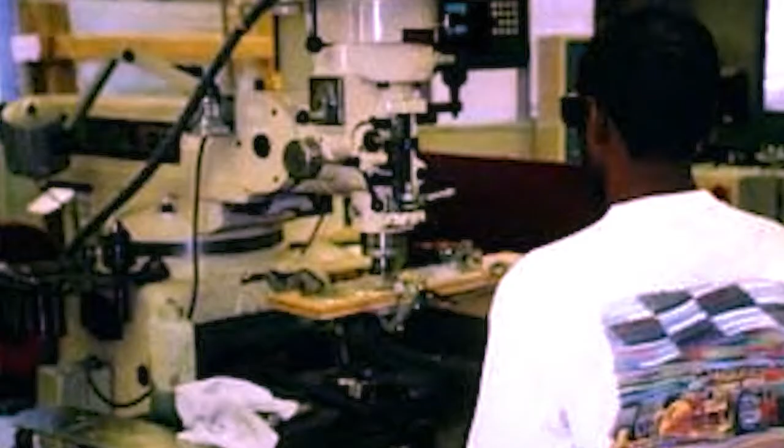When I was growing up, I had visions of fantastical giant robots that would fight for good, and amazing vehicles that had a configuration for every situation. Cool engineers and inventor types that were knowledgeable enough to get out of any predicament. Or strong warrior characters with indestructible weapons that fought to protect that which was good. The influence of these shows told me of what I was to become, an engineer.

I've spent countless hours contemplating how I can make that which I've seen into reality. Now I have the power to do it. I've designed and created many things, and I've been doing it for over 25 years. And now it's time for me to share my process with you. I draw inspiration from concept art, shapes, ideas, media, nature, whatever.

I'm going to show you how to take a vision and step by step make it into a reality. I'll share with you the tricks that I've used to help me create things for over 25 years. Now, join me as I endeavor to create a whole new plethora of projects. From the simple, the niche, to the overly complex. This is Designed by Purpose.

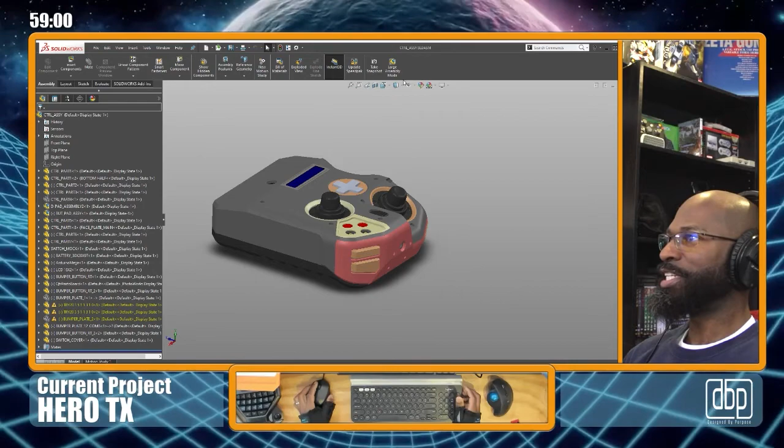I'm kind of anxious to get going and stream today, and maybe stream every day, because I see that when I stream, I'm working on the project, and that means it's getting closer to completion. That means it's closer for me to be able to use it. So I'm really excited about it. I've been wanting to build my own radio for a while. And so now I have the power to do it, just like the video said, right? So that's what we got going on.

So recap of yesterday, I was working on the bumper. I streamed. Of course, the stream had problems because for some reason my computer's upload bandwidth was really shaky yesterday. So anyways, I restarted, did some refreshing and stuff. So it seems to be working good today. So we shouldn't have that jittery video.

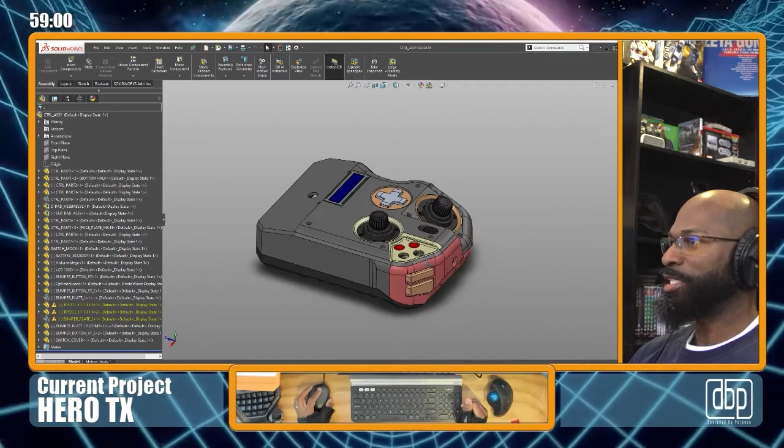Okay, but I was working on the face plates. I combined the two face plates into one part. And so that's what you see here on the front of the Hero TX. So I'm really happy about that. I still have to go back and clean up some things, but I'll do that at another time. Mainly, I just want to press on.

So also yesterday I was working off camera. I actually started building an on and off switch. I already had a place for the on off switch to be. I have a mock representation of the actual switch. I'm not going to grab it. It's somewhere in the little project box, but I have a switch that I'm using. Just a single pole, single throw switch, I believe. Yeah.

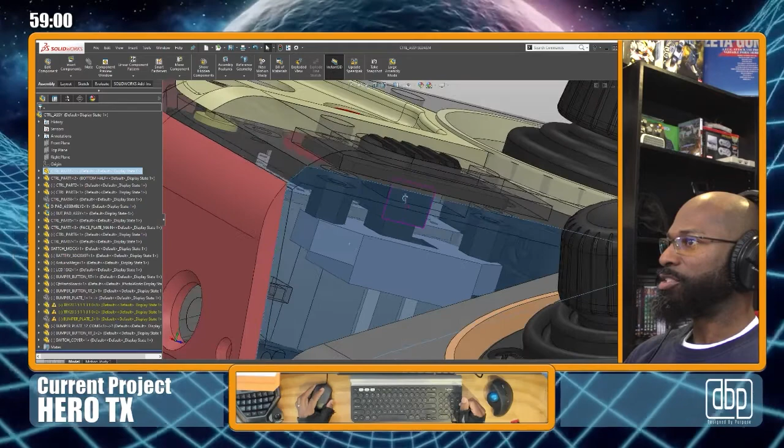And it's got standoffs on it already, and all I have to do is 3D print a little switch cap. I've got the dimensions mostly correct. I need to get a little closer for the switch stem. So I need to take care of that, but I won't do that right now. But you can see that the gray faceplate is what holds the switch cap in. So it's got this flange on it.

You got the switch, the little part where your finger's going to touch. Then you got a flange just floating right underneath the surface of the faceplate. I had to make sure that the slot or the opening or the void was big enough that the switch can slide back and forth. So that's cool. I think that gives another reason for using the faceplate in the first place.

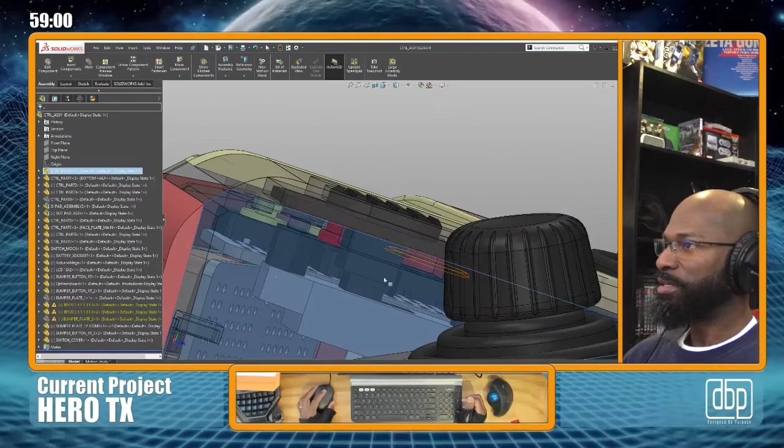You know, I could have done the switch underneath the original piece, the main portion, but the faceplate gives me some other options. So, I mean, you can design it either way. That's just the way I chose to do it. But I think it's coming together pretty cool.

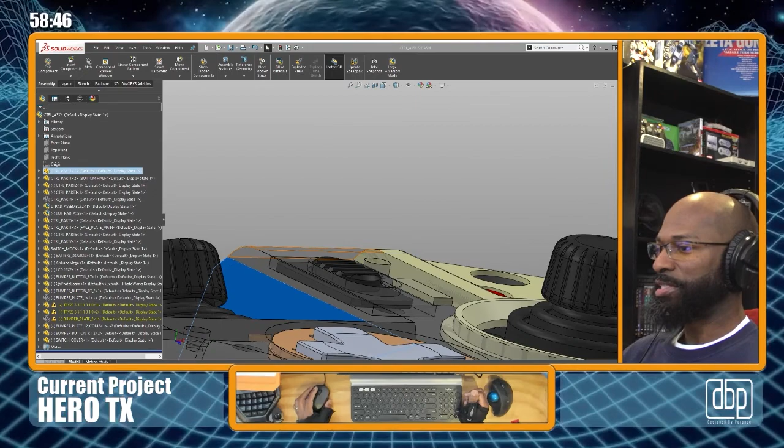So, all right, let me put that. Oops, I forgot something. I'm getting used to it. I forgot to turn on my timer. Let's see here. Start it. All right. Back to the grind. So yeah, today's episode is playfully named, oh no, I'm pushing the wrong buttons, playfully named The Grind. Make sure I push the right buttons. Here we go.

So yeah, this is the grind. Doing it every day, trying to get this thing done. I have other projects to get to, but this one's the current one. So, okay, we got the switch. Of course, we're not going to work on these buttons.

What I think I want to do today... I also finished up adding a duplicate bumper button, right? I added that to the left side, so that's good. The clearing for it is good. I do want to open it, but I'm not going to do that. I'm going to make progress. Let's see something else we can make progress on.

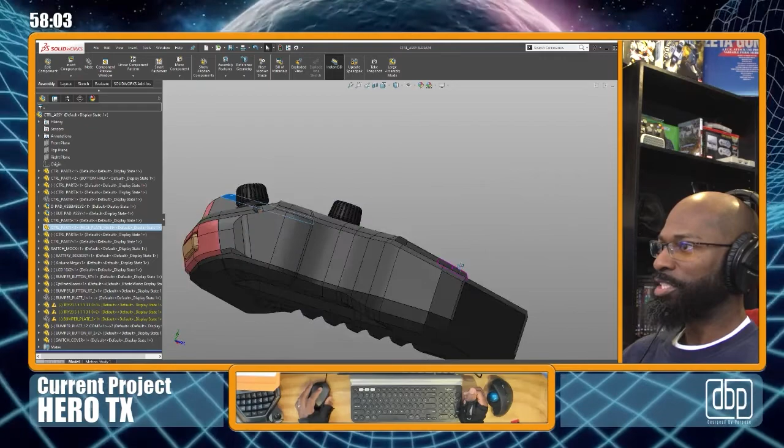Now, just so you know, let me open this up. This is battery operated. I actually do have a LiPo battery that I was planning on using, but actually I was going to buy a new one, and this box right here represents the dimensions of the new battery. I think it is from Hobby King. So this represents the dimensions of the new battery, and I want to make a battery tray for it.

So what I want to do, like my old Futaba, it has a hatch on the back, a snap hatch right here on the back. And that is how you open it up. Matter of fact, I can just go to the Futaba real quick. So you can see on the Futaba it has that hatch that comes open, and you have the plate. I don't want to do that same thing. Not knocking it. I just don't want to do that.

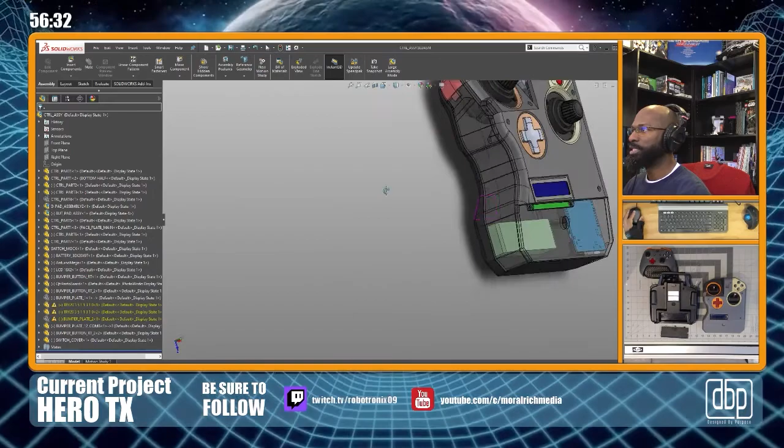What I was thinking about doing more was having a battery tray that slides out from the side. Partially the reason why is because this is all run by an Arduino Mega. You can see this is the Arduino Mega model, courtesy of GrabCAD, I believe. So I'd like to do some kind of tray, but now I have to think, is the tray going to actually be attached, or does it slide into the back side, or does it slide into the front side?

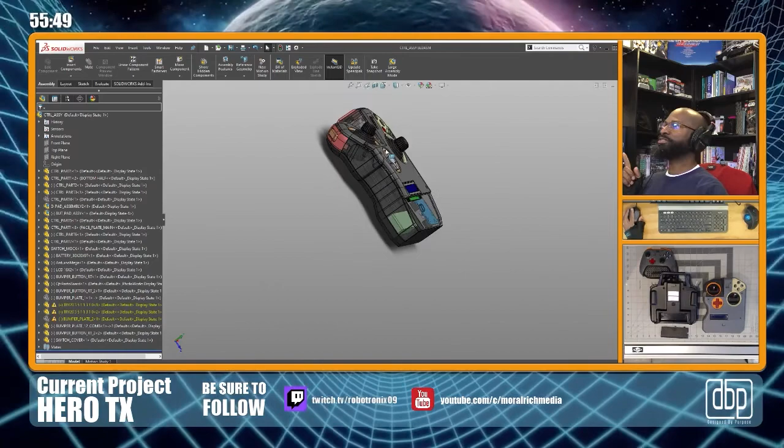Because here's the thing. When you're working on this radio and troubleshooting it, and you take it apart, you unscrew it from the back and remove the black back cover, right? You remove this side. I want everything to be on this side. I want all the electronics to be on the front plate, so that if I'm working on it, I can just work on it that way. I don't want to have to unhook something from the back plate. If I don't have to do that, I shouldn't do that.

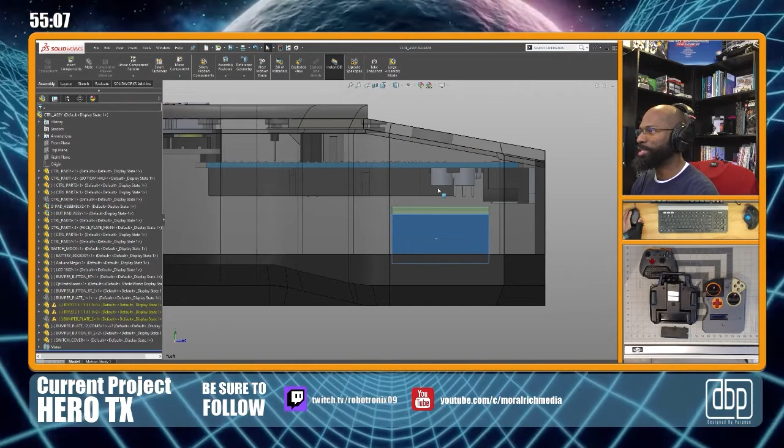So what I may want to do is actually try to take this battery and make whatever holder for it attached to this top side. Let me see how it interferes with the Mega. So it doesn't really interfere with the Mega. There should be enough room in there that it can slide by the Mega, or sit comfortably next to the Mega. So yeah, process of design. I'm designing as I go, actually.

So, it's a good question. I don't have the web set up where I can search tray design, but I need to think about a tray design. How do I want to do it? And also, how do I want to incorporate it to the top piece? Let's open this up. Okay, it opened.

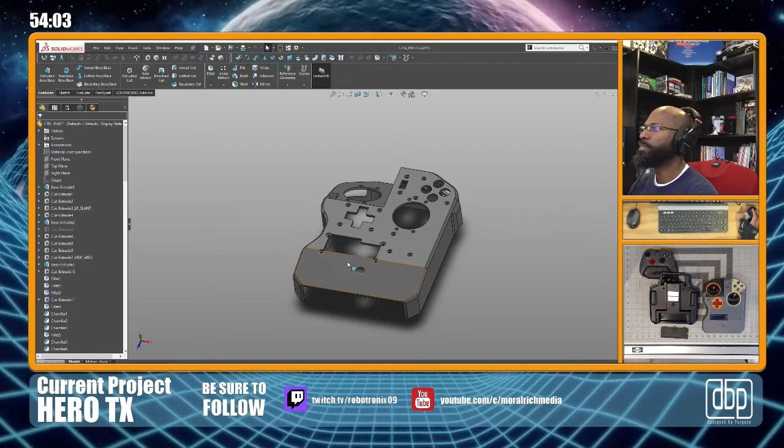So remember, this is going to print vertically. If you're looking at it from the front, it'll print vertically like this. I'm looking at it from the side. When you're 3D printing vertically, you want to avoid things that need supports. I haven't really mastered that yet. I know they have tree supports, and I haven't mastered using that yet.

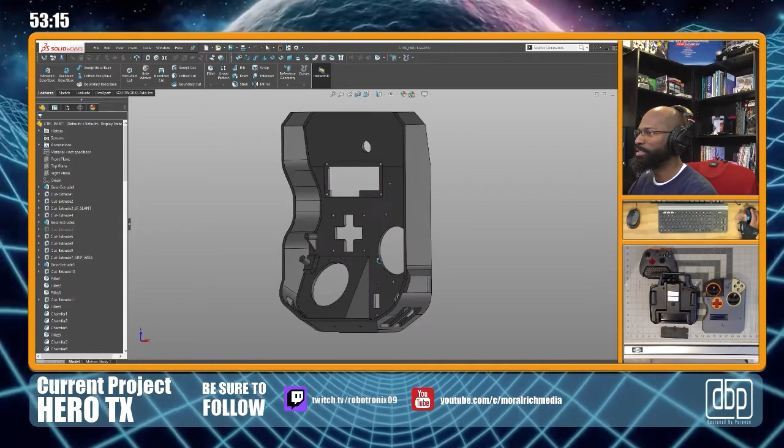But I know if you can print at like a 45-degree angle or greater, then you won't need supports for it. So I've been trying to utilize that fact to help me get my print going and get the best finish. Unfortunately, these pieces right here, I had hoped they wouldn't need supports. This one may not, but this one turned out that it did need supports, and I didn't like it.

I didn't like that, and I couldn't figure out if there's an option to turn it off in Cura, where you could actually not have the supports here. But for some reason, it chose supports there as well. It also chose the support for this part of the circle way up here. So there's this long piece of plastic that was trying to print all the way just to touch this little spot. I really wanted to see if I could make it not do that, but couldn't figure it out.

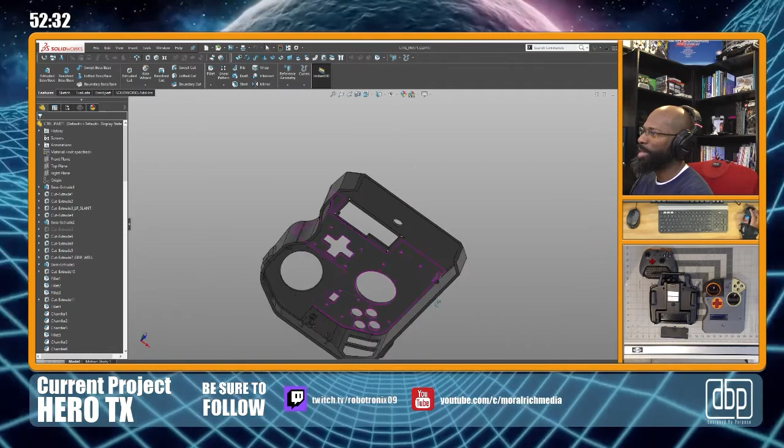So back to what I was talking about, the battery tray. So what I'm thinking is maybe a whole separate piece that I could glue in here, or something. I have to match this angle though. I mean, it's not a big deal, but I just have to match that angle and glue it in here, and then I'll take it and cut this door. Matter of fact, right now I'm just going to cut this door out, cut a slot out, just so we can kind of start thinking about this stuff.

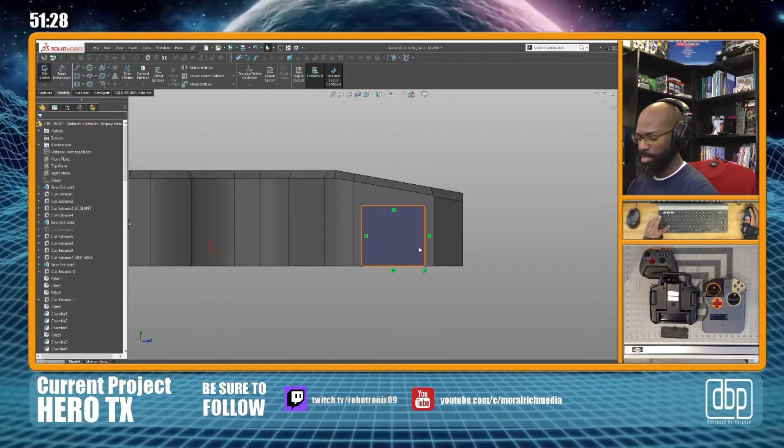All right, so I'm just going to take normal to my surface. Oh, come on. What in the world? And I'm going to grab this rectangle. Let's just take a portion out of here. Let me undo that for a second. Just give me a center line right here at the midpoint of this edge. Now I'm going to take my rectangle. Put it there. Come on. Select this midpoint. Just snap it to the center line.

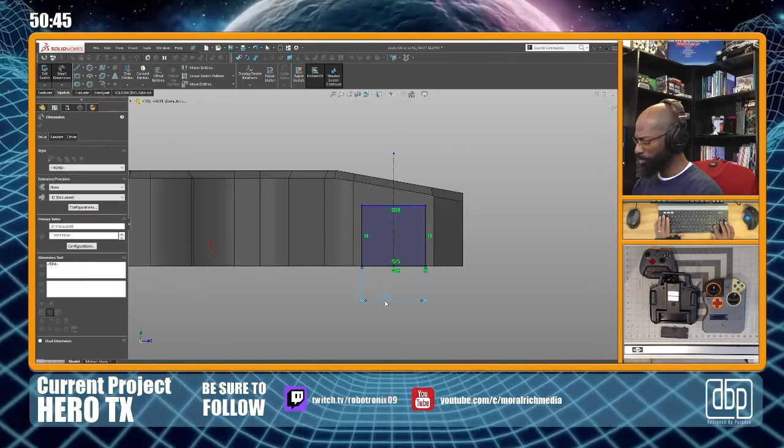That's cool. I know there's a symmetrical command. You wouldn't really need it on this little thing, but I think I had to use it for something else. It was a command that I hadn't used before. What in the world? Why didn't that grow? Oh, I just saw that some things are moving a little bit slow on my computer. Okay. All right, let's make it an inch tall. What is going on? Come on, Solidworks. What's happening? I think I got too much stuff open today. Let's get this. All right.

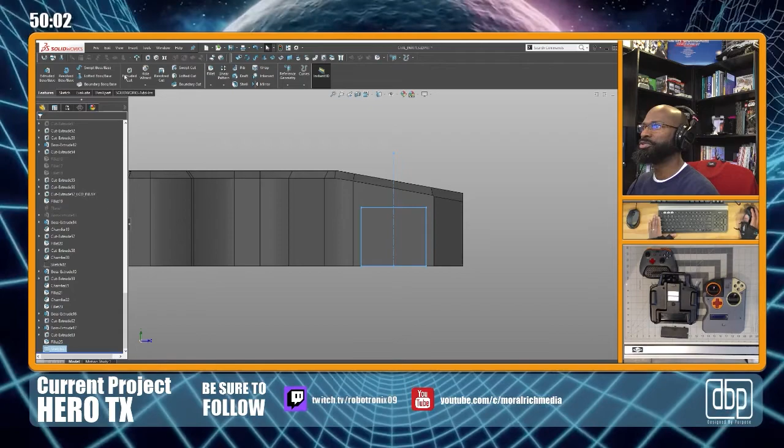Oops, I messed up. I got out of the sketch instead of going to extrude cut. I keep trying to tell myself not to do that. Instead of just exiting the sketch, just go to extrude cut. All right, so we're going to do this. We're just going to go to next, I think. Yep, just do that. Let's just cut this out. Let's check out the assembly model again.

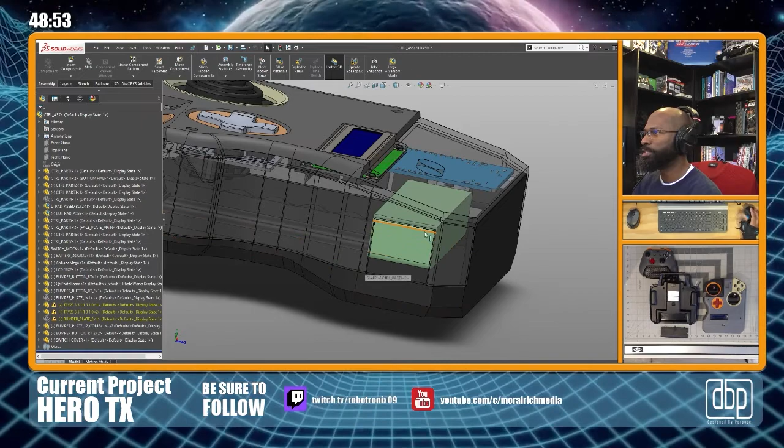All right, so I see this door is not quite big enough. Now, I could flip this and go vertically, and I may need to do that, so that I can stay within the width of this face, because there's this, you can say chamfer here, and then it starts a radius or curve right there. So if I want the battery just to specifically be in this face right here, then I may need to turn it. So let's try turning it. Make sure everything's working good.

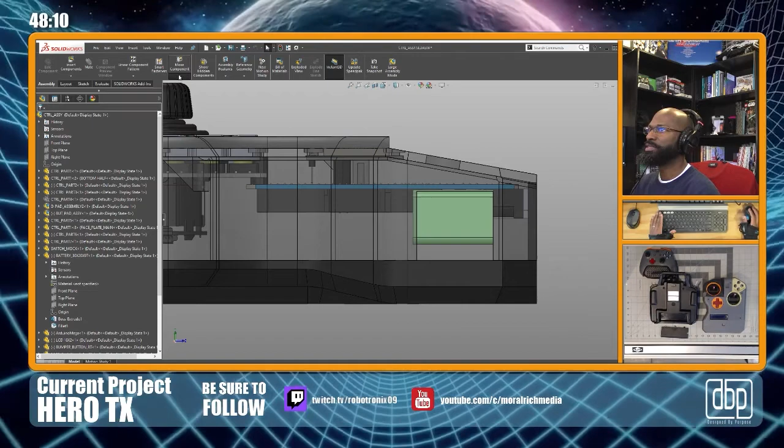All right, let me see if I did some constraints. Should just be floating in there, but I may have done some mates. It doesn't look like it. Battery. No, it looks like it's just floating around in there. Let's see if we can rotate it. Yeah. All right, let's get it kind of close. All right. Ooh, it's got quite a bit of length on it, so it does pass into the bottom half. So if I was going to do it this way,

do I have any more water? Could you, sir, waiter, could you give me some more water, please?

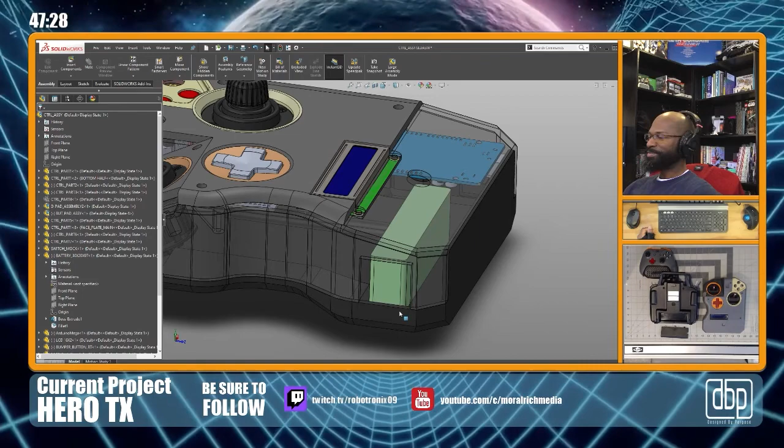I don't know. Do I want to do it that way? Again, I want it to be a part of the top half. Now I could make it deeper in there. Let's go. All right, oh man. Back. I can't make it really deep enough. It looks like, oh, hold on. No, I can't force it. I can't really force it to be that deep.

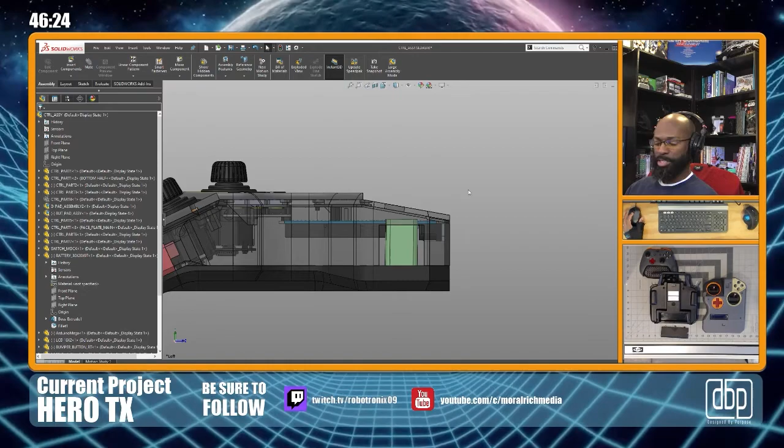Now I'm just debating. Sorry, but this is part of the design. I'm sure there's many designers that go through this sort of thing when they're creating something from scratch. I'm trying to think about it with the end in mind. I'm gonna make it flat again, and then I'm gonna see if I can widen this up. All right, let me rotate. Come on. All right.

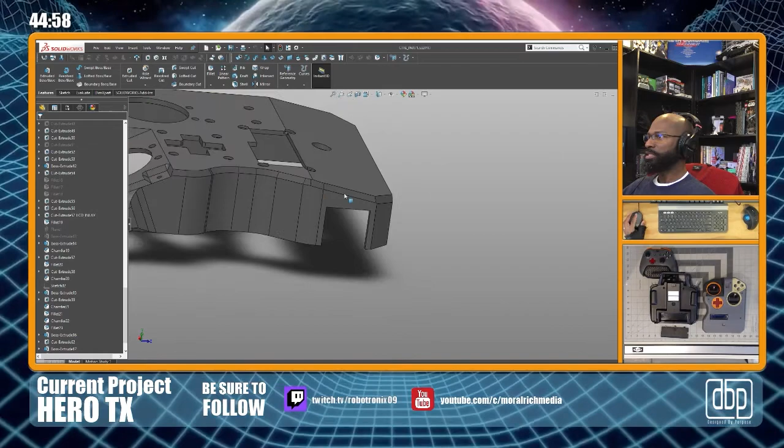All right. Okay, so what I'm going to do now, I am going to widen this. Let's see here. Okay, let's make this 1 1/4. Let's make it 1 5/16. Okay, that's kind of looking good. Let's bring it up a little bit. Let's make this 1 1/8. Yeah. All right.

We gave ourselves some more room. Is that good? Let me see. I may fillet these corners, round them out. We'll see. Let's go back to the assembly. All right. Okay, so that is wide enough. That should be wide enough.

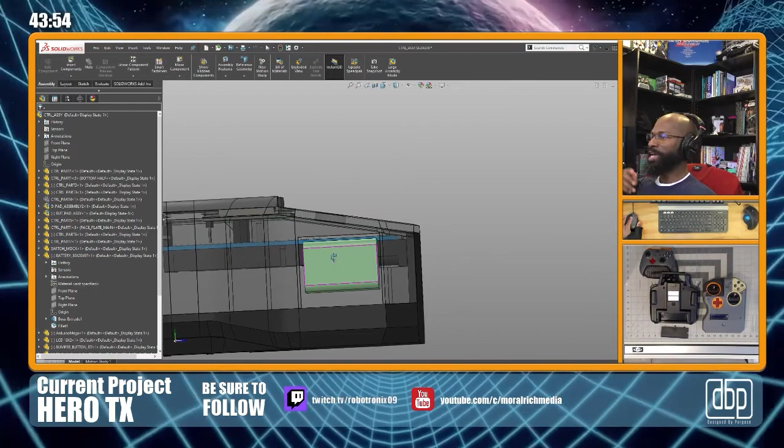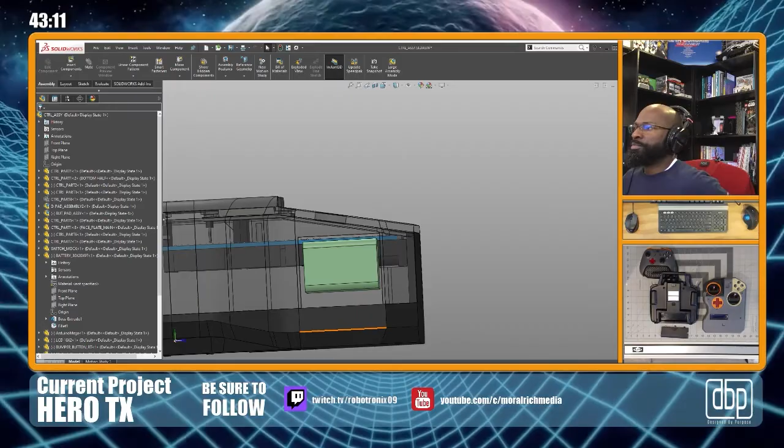Now I mentioned tray earlier. So if I put it on a tray, like the battery is actually a part of a tray, I have a good example that I want to show. Bear with me for a quick moment. Okay, so here's an example. Let's just look at it. I'm going to switch views here. Hey, you can see me all big and stuff.

All right, so check out this microphone receiver, wireless receiver. It's out of focus, but right here is a little tray that comes out, and I'm gonna pull the tray out. It has a little clasp. You pull it, you squeeze it, and then it just comes right out. So this is for AA batteries, and it actually has holes. Let me see if there's a better view.

It's got holes so that the contacts of the battery can touch the internals on the inside of the receiver. But the LiPo is not going to be that way. The LiPo is going to have a connector. I forgot the name of the plug, but those yellow connectors or something. It's going to have a connector on it, right? So I need to think.

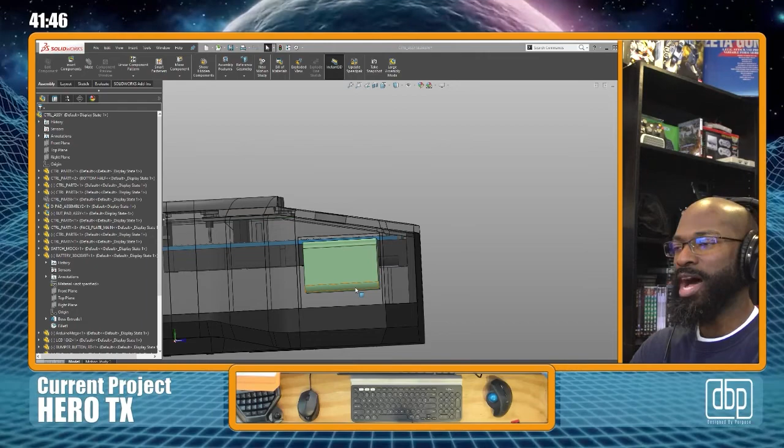And really, you wouldn't be taking it out that much anyway. Why would you be taking it? Well, you wouldn't be taking it out hot. It's not hot swappable. Ideally, I always like to imagine having hot swappable batteries in whatever, if I'm using the radio, especially the pistol grips, right? Wouldn't that be cool? But typically you're not running it so long that your battery's dead. So is that even really a good design consideration?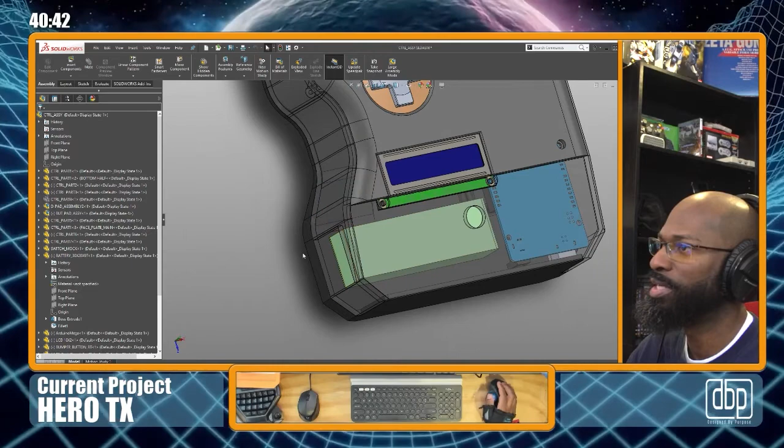But main thing is I want to get a battery in here, right? And I'd like to be able to access it without having to go through a whole lot of trouble. I just need to figure out how I want to do this. Now, I'm thinking. And then how am I going to do this door? So the thought was, if I had the tray, the whole tray would encompass the door. And so when you go to remove the battery, the door, everything just slides out of this opening. I guess I could do that.

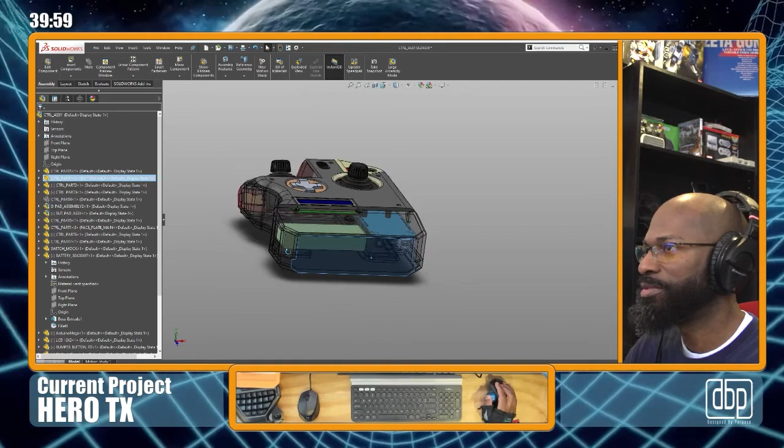So there's space. Let me look. There's space underneath the Mega. There'll be some wires coming out of the ports, but there's space underneath the Mega. So there could be space under here for the connectors of the battery and the leads, right? And then any other wire. So then that would have to be long enough so that when I pull the battery out, I could connect it outside of the radio and then slide it in.

And then it'd have to be guided too, because if it's not guided and you just slide it in, it bunches up in a random place. I wouldn't really like that. That wouldn't really be elegant. I don't mind there being a loop of wire in here, but I wouldn't want a loop of wire just kind of, I don't know.

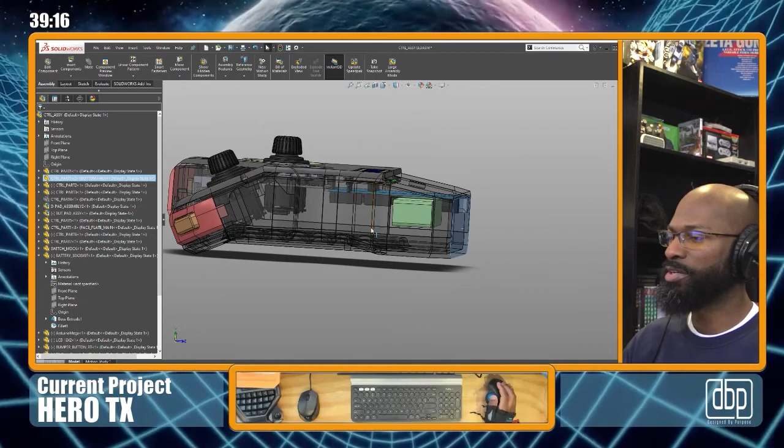But there is a lot. It should be plenty of blank space or empty space, so there is room for the wire to come in and not be a problem. The only thing is now you've got to wire this. It's got a little weight to it, and it's loose. It's hanging loose. So when you're moving around the controller, you're going to hear that pap pap pap. So I don't want that. These are the things I'm considering as I create this.

Good questions. Maybe I know. I think I know. So, but this doesn't go in deep enough. If I dropped it down, well, it would have to come down a lot. It would have to come down almost into the back plate in order to get by the Mega.

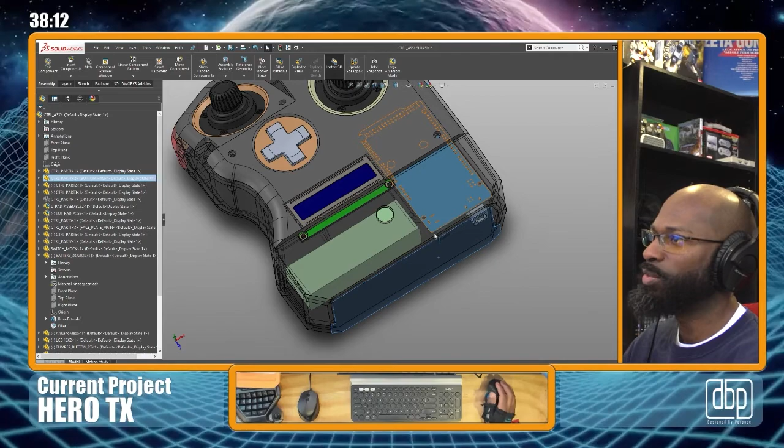What I was going to do was, I could take the power wire, the leads, because it's power in the Mega, yeah. So I could take the wire that comes from there, run it out and secure it somewhere on this side, right? And then have it where the leads from the battery come out this way as well, and then you plug them in, and then you just tuck them in. So what I could do is I could probably drop it down. Yeah. Okay. I'm kind of feeling that a little bit.

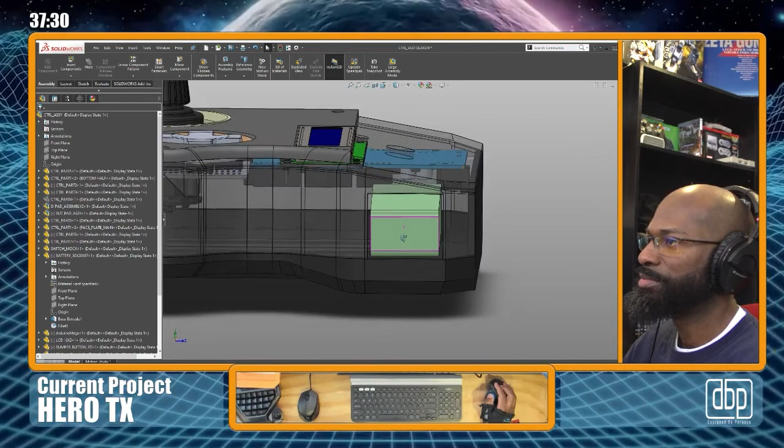Okay. So let's say we take the battery, let's drop it down a little bit. Oh, we don't have much to drop down. Let me turn this back, make it dark again. All right. So we take the battery. Let's make this. Got to switch hands. Oop. All right, so now I could cut more of this out. I don't want to cut this out and make it where now this piece is kind of flimsy. So I have to be mindful of that.

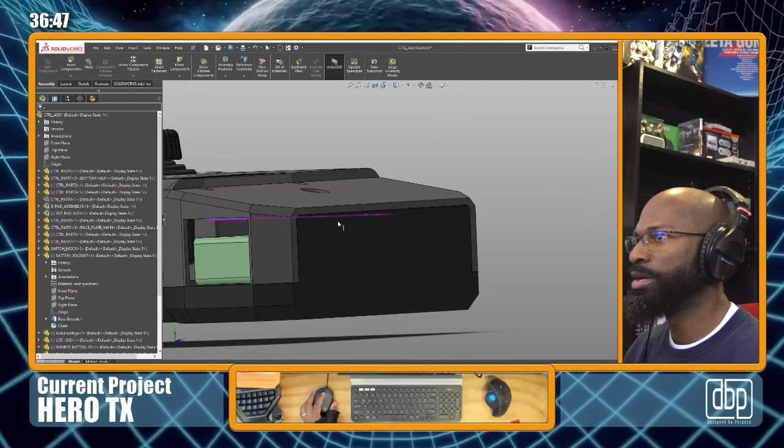But yeah, I could secure the leads. I could secure the power wire up here somewhere. Then you connect the leads, and then you tuck the connected wires in this top void. So whatever tray or something I make, I could make it where it has a void there where you stick the wires into, and that keeps them kind of secured, keeps them away from a whole lot of mess. I think that might be an option.

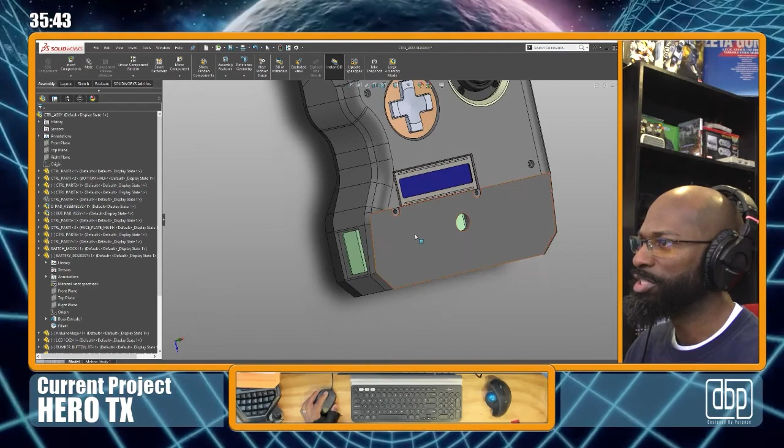One thing I would say over my years of designing, and I always tell this to somebody who wants to get into it, and this is my opinion, of course, I like to say that things really design themselves, right? If you put a bunch of components together in a pile, and you're trying to make something out of it, by looking at the components, a lot of times they'll give you clues or tell you what way they prefer. I mean, it's personification, right? But what way they physically prefer to be connected or joined together.

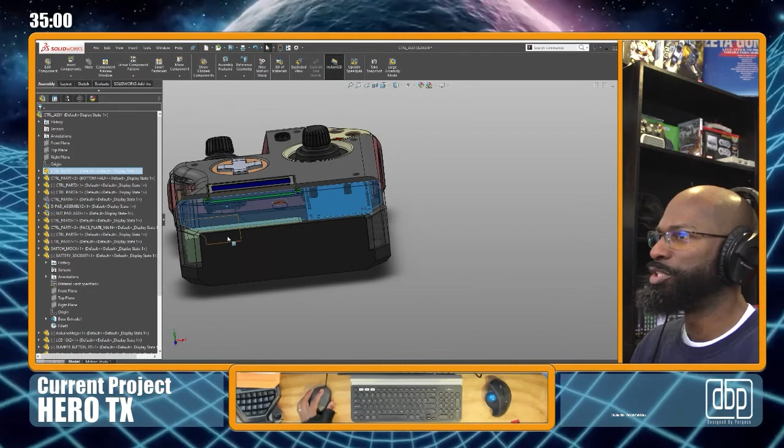So I do look for that, and I do believe that's kind of the case. I think they have a natural way that would be good to join them with something else. When they were designed, somebody may design it with a big flat portion on it or something, and that flat portion may be perfect to mount something else on. You know what I'm saying? So I do believe that is a thing, and I do look out for it, and that's what I'm looking for right now.

So what I originally wanted to do with this, well, you can see how I printed it. This is the front half. The bottom half, let me open the bottom half up. Oops, let's see if it opens. So the bottom half is actually to be printed this way, so it's right side up. Okay, so it's designed to be printed this way.

The only reason I didn't print it yet was because the version that's sitting over here, the main body version that's sitting on my drafting table, is too shallow. So I actually changed the height. This one, if it was all put together, I think it's maybe 2.5 inches or something. But the current one that I'm working on in the CAD model, the whole assembly is thicker.

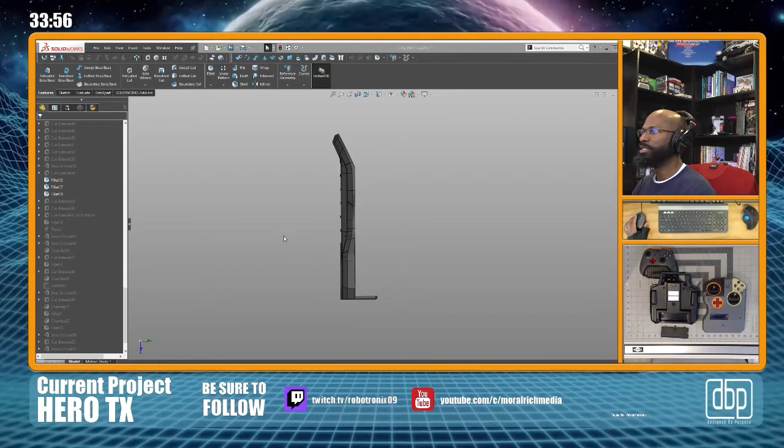And I had to do that because I didn't account enough for the depth of the joysticks. So the joysticks had a little bit more depth in the back. And these aren't the joysticks I'm using. I'm using some other joysticks that are actually sitting in the 3D print back there, the current version. But these are joysticks that I would like to use in the future.

But anyways, the original print didn't have enough depth. So I can't just print a new back and put it on there because it won't fit, not with the joysticks installed. So I actually have to print a whole new front, a whole new main body, and then print a new back. So that's the reason why I haven't done it yet. So back to what I'm talking about here.

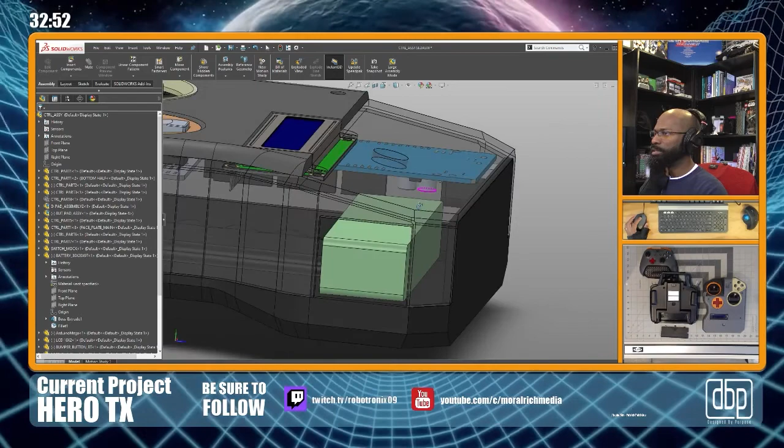It's not jumping out at me just quite yet. All right, so I have to ask myself, do I want to do a door like Futaba has, where I have this plate, and I got these ledges on the side, on the left and right, and it'll sit on it and then slide and lock.

Now I'm making this out of PLA, and the PLA I have is kind of brittle. You don't want to have any kind of tabs that you're trying to bend to make them lock or anything like that. So that's not really what I want. And I have some ABS, but I haven't had any kind of practice with the ABS yet. So that's something I'm going to have to work towards.

Decisions. Well, okay. While I'm sitting here trying to figure this out in my mind and get a good way forward, let me stop for a second. Do y'all get writer's block, a designer's block? I guess if you're doing this for your employer, maybe you don't have that leeway, or maybe you're working with a team. Here's another question, and I'll leave it in the chat. Do you find it difficult to work in a team? I'm talking specifically about design, engineering jobs.

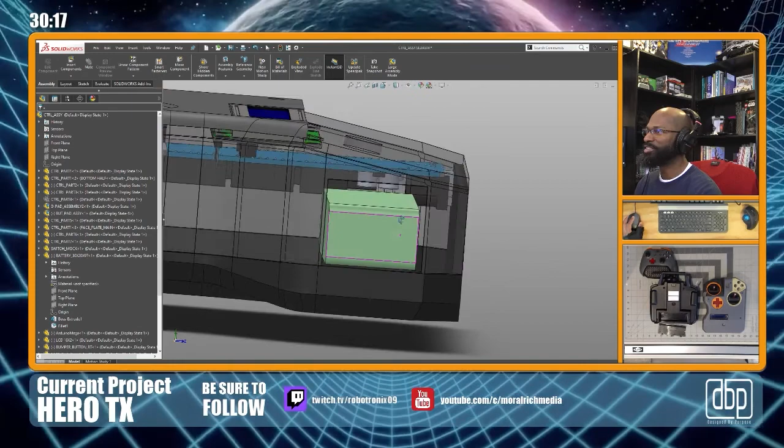Let me write. Do you find it difficult to do design work on a team? I guess it depends on how well the team gels, right? I guess you want diversity in thought, right? You want different backgrounds looking at the same project for sure. Because if everybody's kind of the same, then it pigeonholes you in the same line of thought. Of course, it probably makes the project go a lot smoother, a lot easier, because everybody's already going the same direction. Interesting.

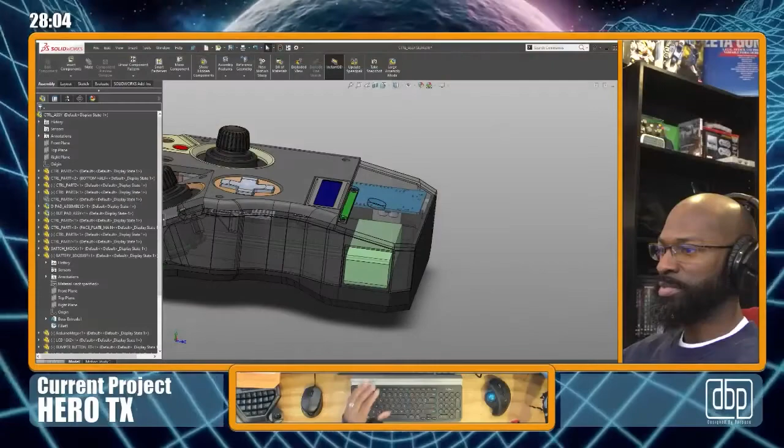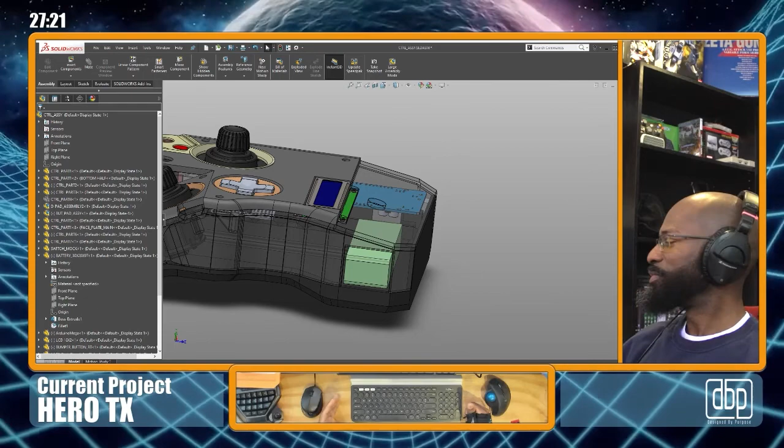I know for a fact that Daniel is a person who's really into design, right? He designs like it's in him. So as we're going through this battery door, all this stuff, that's something that he takes great passion in doing as well. So I know he's done a good job on that. I didn't know that you could get, I almost say like a gourmet or luxury marking pen. But if you're going to get one, that's the one to get, right? So pretty cool. Shout out to him for that.

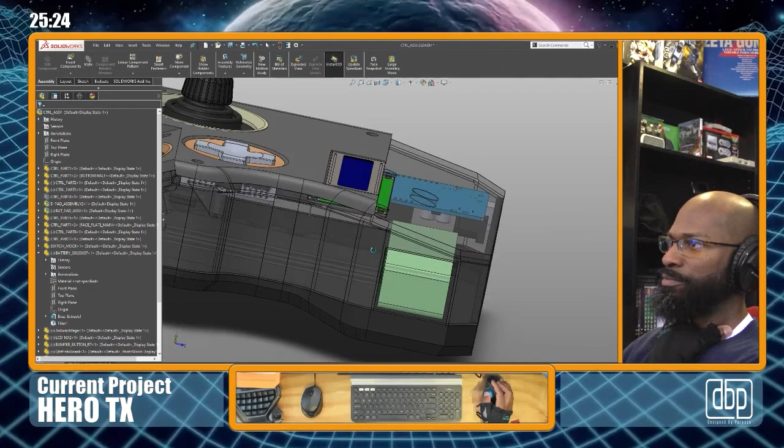Battery box. Battery tray, battery box. It's definitely going to be another part that's going to be added in here. Now I can screw it in here, I don't really want to glue anything. So yeah, I may screw it. I want to do it on my drawing board, but I don't have things set up yet. I need to get my camera set up on my drawing board so you can see me sketch. Because at this point I kind of want to do some sketching, and I do not have everything set up to do it on the stream yet.

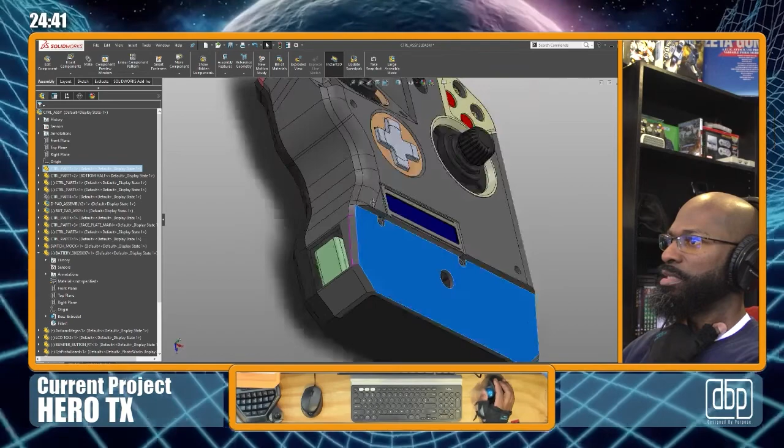Let's see. Let's close this. And maybe I'll go ahead and just make a part. All right, I'm gonna go ahead and make a little door and see if I can make a little tray. Okay, what plane is it? We'll do it on the, so new part. All right, let's use the hotkeys, man. Let's get efficient. We'll talk about that another time.

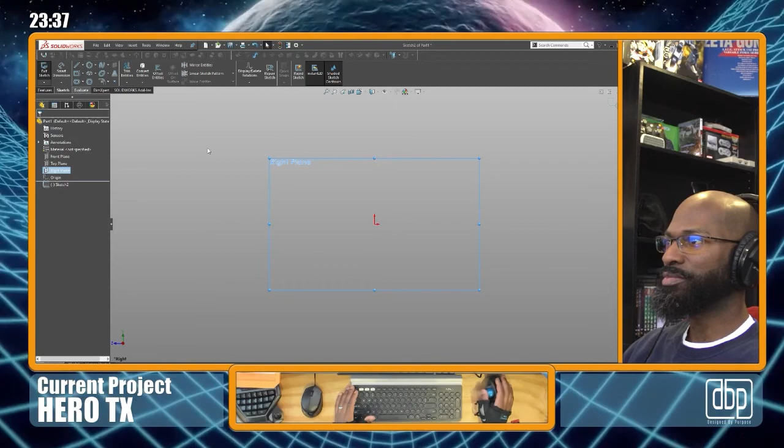New part. I was going to talk about the default orientation for the coordinate system in SolidWorks. I found out the hard way that it defaults to Y up instead of Z up. And so, oh man, why did I do that? I didn't want to do that. Ugh. It changed. I wanted to sketch on this side, but when I made it, it took it back to the other side. I'm just not gonna worry about it right now. All right.

Does anybody remember what those dimensions were? I think it was 1 5/16, and I think it may have been 1 1/8, 1.125. All right, we'll do that. Okay, I did not exit the sketch. I just went to extrude. I'm going to do it from mid plane. I always do it from mid plane. I don't know if you guys do that, but I almost always make my parts symmetrical about the mid plane. Okay, let's see.

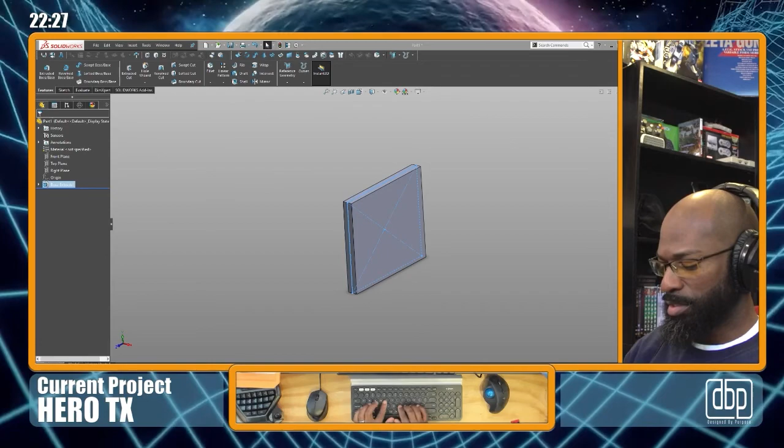I'm gonna name this battery tray. How do you guys name? In your respective jobs or when you're working on something for yourself, what's your naming convention? Battery tray. Because mine have been all over the place. I have not settled on a consistent naming convention when I'm creating things. Let's see, I want to see what side this is on.

I'm going to bring this into the model so I can kind of see. Insert battery tray. So for a while I was naming all my parts as numbers. So part 1, part 2, part 3, part 4. I just do it that way.

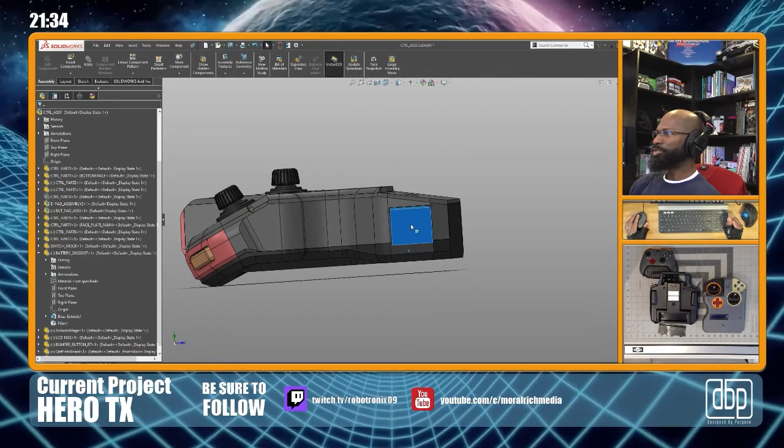So they're very nondescript. And then I also named them where it's still part 1, part 2, part 3, but then they have almost like a suffix. Like this would be, I could do hero, well that'd be like her or something would be the suffix or the prefix. Sorry. Or well, sometimes it would be the suffix. Sometimes I'd let it be part one underscore her. I guess that doesn't make any sense. Or what I would do is also part 1 underscore and then maybe an abbreviated description of what the part is. I don't know.

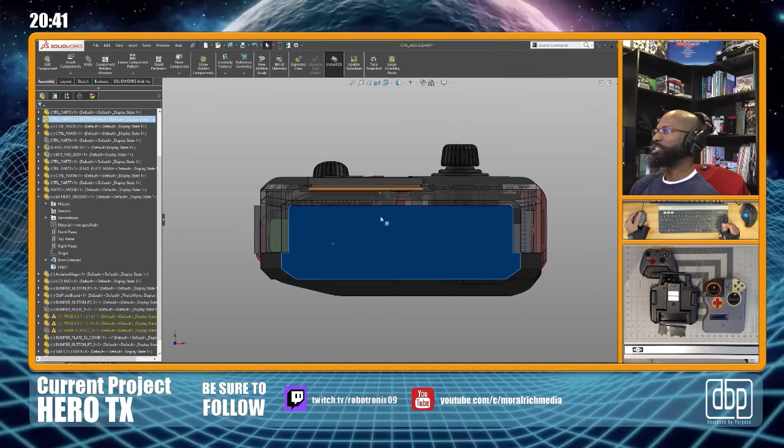I'd be curious to know, okay, how do you guys do it? I'm sure we could do it any way, but I know there's probably a smart way that's like, oh, okay, I should do it this way because this way makes the most sense and is most versatile for many different projects, whether it be a project for your employer or just a personal project. I think it's got to be locked in.

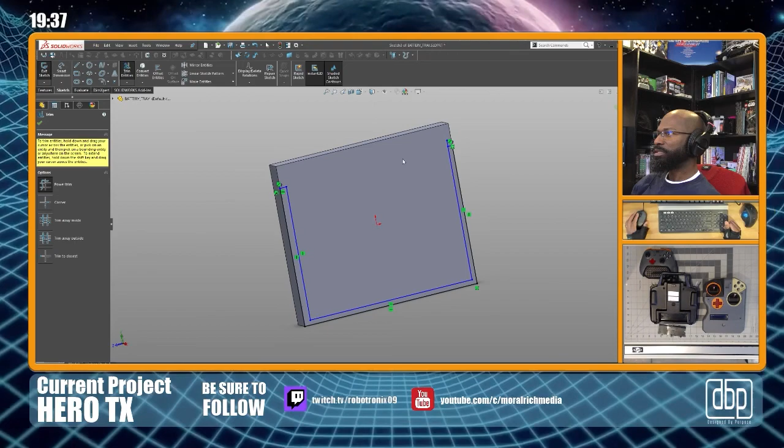Okay, let's open this part in position so that I know where I'm at. Open part in position. Okay, I did that. All right, I'm going to make a tray. All this is, I'm pretty much doing my rough drafting. I'm sketching right now. Let's see. I'm gonna just overlap and draw me another box. Right. Then I'm going to just come and get rid of this. All right, let's do center line so we can line these up.

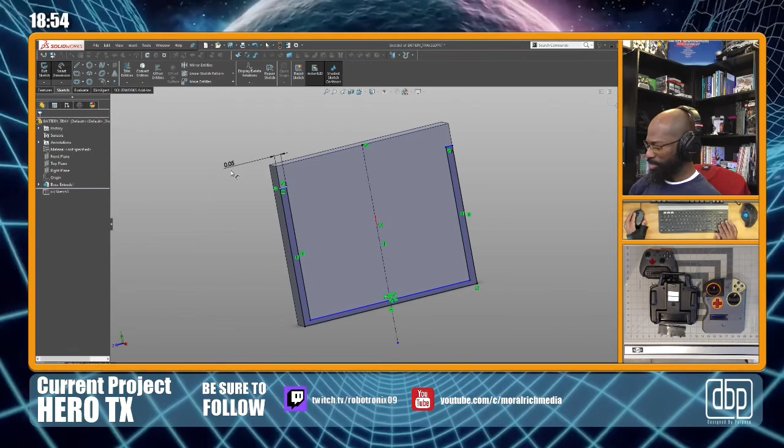I guess I could have done the, come on, midpoint. Really shouldn't have done that one. That one's not the important one. Let's do this one. Midpoint, select midpoint. All right, these should be even now. Let's give it a 16th wall. Okay, 16th wall. Let's give this one a 16th wall.

I don't know where the lag is coming from, but hey, the stream has been solid today, so I'm happy. No glitching today, my baby, my friend, my homies. All right.

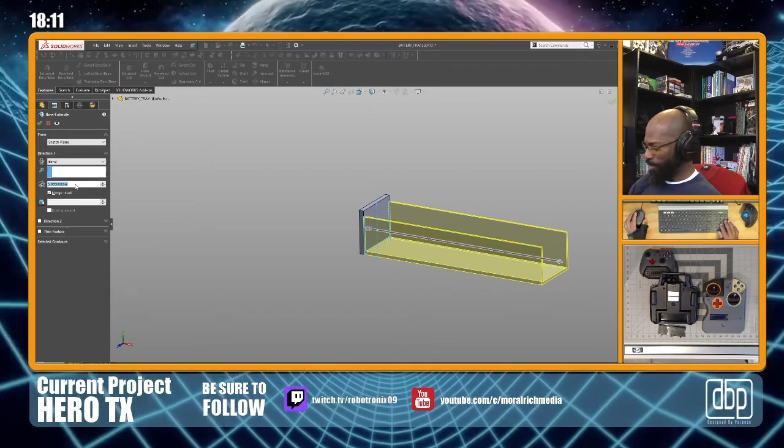Let's extrude this. Oh, see, I exited this. I did an exit on the sketch, and I should not have done that. Trying to teach myself not to do that. All right, let's give it 5 inches. That's fine. Let's just see what we have. Okay, 5 inches is a hair too long. Looks like about an inch too long. So that's a tray. Probably needs to go the other way. Let's go back and make it shorter. Okay. We are going to make this 4 inches.

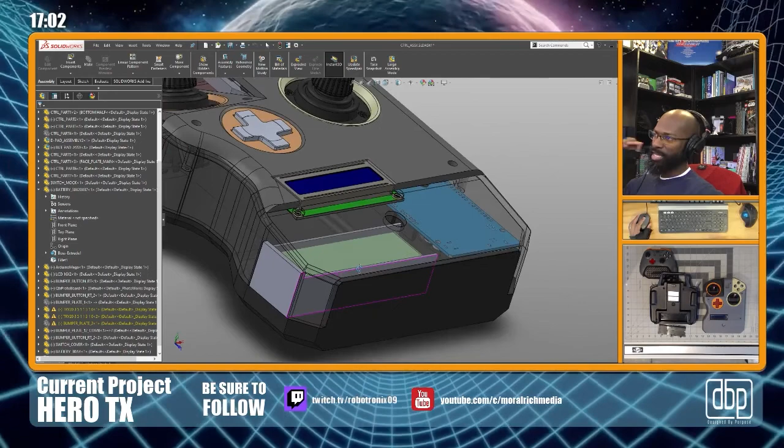All right. Save. Control tab. Oh, did I do it? Control tab. Okay, we have a tray. Yep, 4 inches is good. 4 inches is great because the battery is just under 4 inches. Okay, I think the tray is actually open the wrong way. Well, this is going to be the way I hold it. I mean, I don't know. I could encase the whole thing. Okay.

So what I'm thinking is, I could take this and make flanges up here on the top, flanges like rails. So I could slap some flanges on this top, and then I can make a receiving piece that goes on. So let's go ahead and add these flanges on there. And that shouldn't be a problem in printing because I can print it vertically like that.

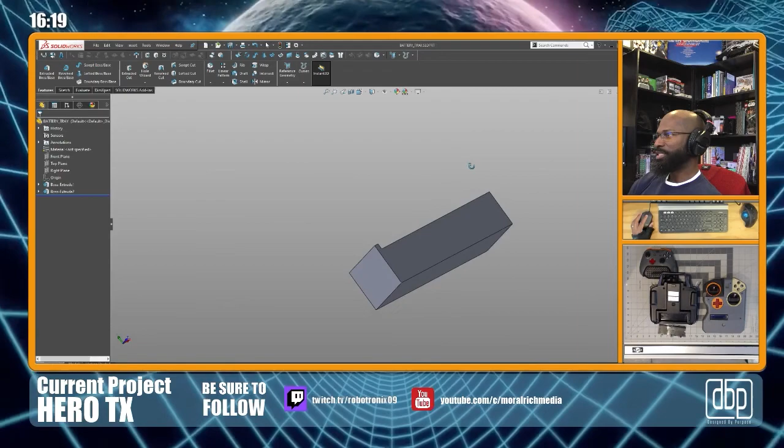Side note, how many of y'all have been following all the 3D printed firearms? Because that's a huge thing. Yeah, it's a huge thing. Very interesting. I mentioned it because I was thinking, oh, this reminds me of a magazine. So that's where it came from.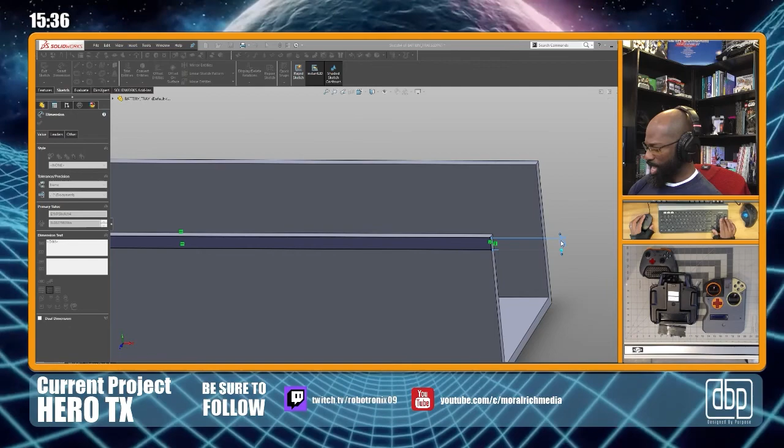All right, so let's just give a dimension on this. I was gonna say 9. 0.09375. A little bit more than a 16th on this, so I have a nice fit. All right, so now I am going to extrude without exiting the sketch. Let's give it 3/16 of an inch. 0.1875. Mirror this. By my front plane. That should be good. All right. Hey. We made progress. I know it seemed a little slow today, but this was the perfect title, The Grind.

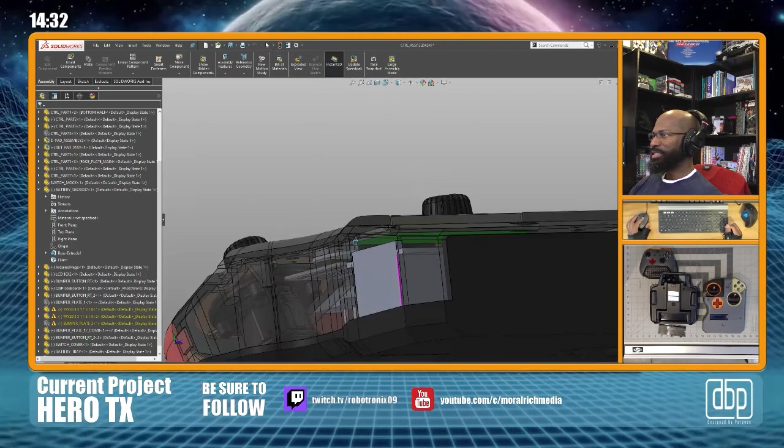So if I do these rails, then I'll probably have to make a cutout. Well, I will have to make a cutout for this. Let me close it up. Excuse me. Okay, so I would have to come in here and you have this kind of cutout, but I think that could still be doable. I also have to think about the release. How am I releasing this? How am I gonna release?

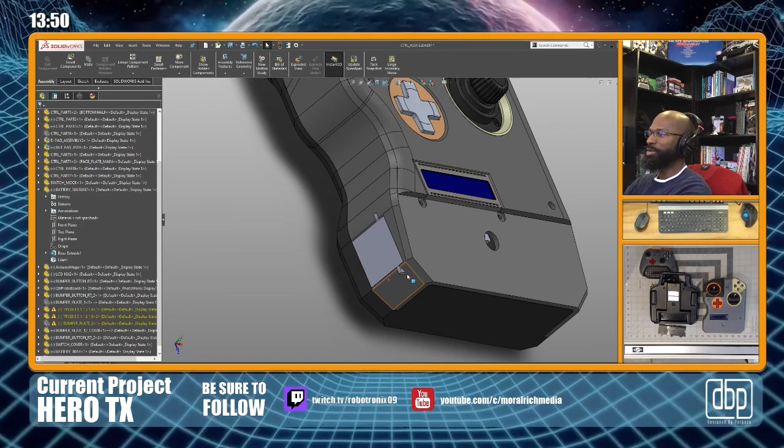Good question. And I definitely want it secured. So if I was walking and had too much in my hand and I dropped my radio and kicked it across the floor, I want to make sure that the battery doesn't fling out all over the place, right? So I do want it secure. I do know I can do a button latch or something like that, but it's not going to be molded in, not with the standard PLA that I'm using now.

But if I do a mechanism where it's actually two parts, it's a little bit more complication, but I know it's going to work. I know I won't have to worry about the bending issue. Now, granted, I don't have to 3D print it. I could actually do old school and machine some parts. So that may be an option to consider.

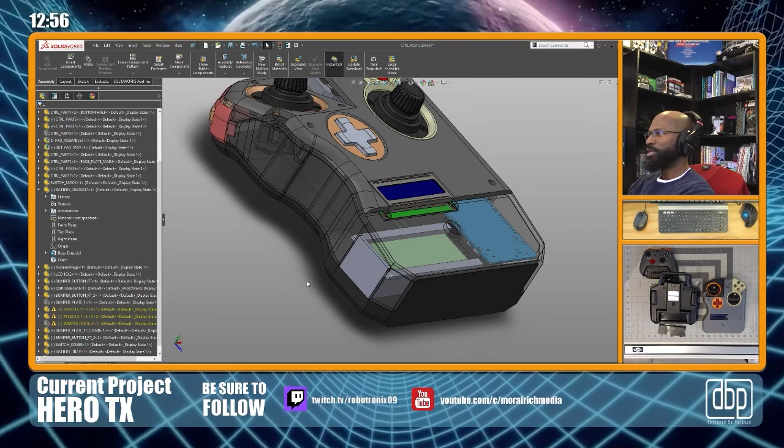Now that I have this much, I can at least think about it, visually see, okay. And I know that the width of the tray probably is not correct with the battery. I think they're overlapping, and the mouth or the opening in the main body of the controller is probably gonna have to be a little bit bigger. I know that much.

I can also create where I have that ledge where the battery tray has a flange and it comes and rests on a ledge. But I can mainly only do it before this curve. But that's not true. I could actually extend it beyond the curve. I just have to design it as such. That'd be interesting. I still haven't solved the snap problem yet. How is it going to go in there?

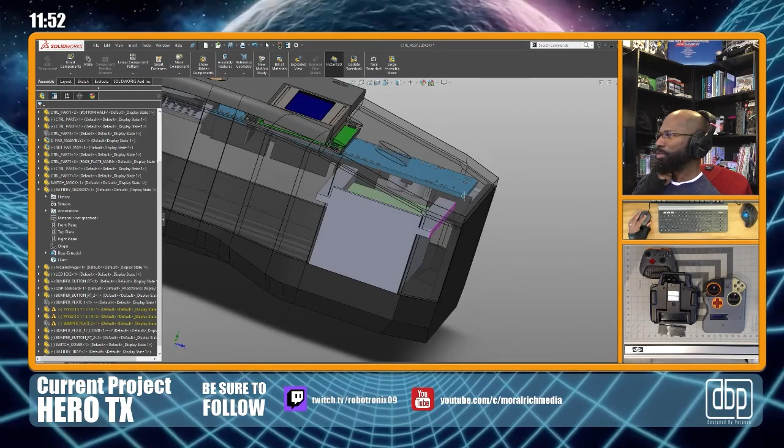Now I know I can create the receiving piece that'll mount to the top inside of this piece. I'm gonna see about cross sectioning. Yeah, there we go. Little cross sectioning action there. So you can see how I messed up on the width and stuff. Let me just move this over. Okay. All right, so now I actually got it in position.

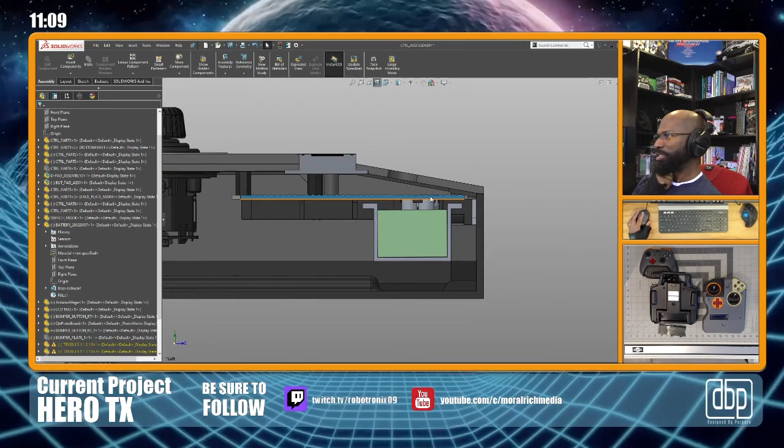But that's overlapping into the LCD. So if I wanted to create something, it won't mount here unless it mounts beyond the LCD. I don't really want to do that. Excuse me. Oh, goodness. Well, it's about time to wrap up. You guys can kind of see how I'm placing some of the electronics in here. It's not a lot right now. Okay, well, I still made progress.

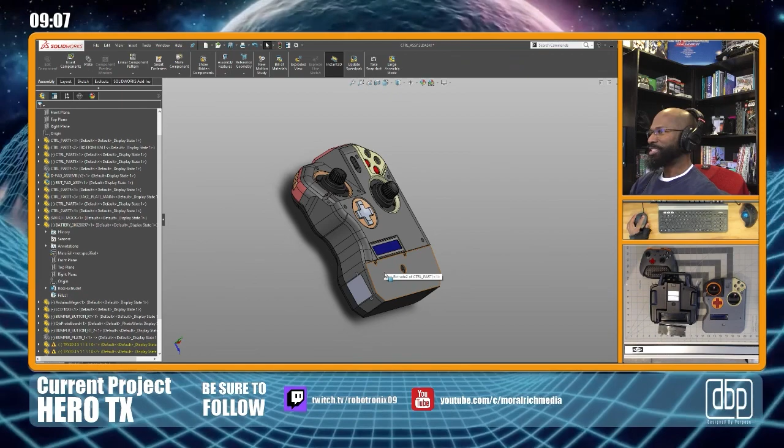Again, we are making progress. Today's episode was the grind. I am thankful. I am excited that this will eventually get done, and I'll have it actually in my hand. And then I can move on to the next thing, because we're designing the radio. Well, what is the radio going to control? That's a whole nother can of worms. Another project that I started quite a few years ago that I need to revamp and get working before July, I think. So I'm excited to share that with you.

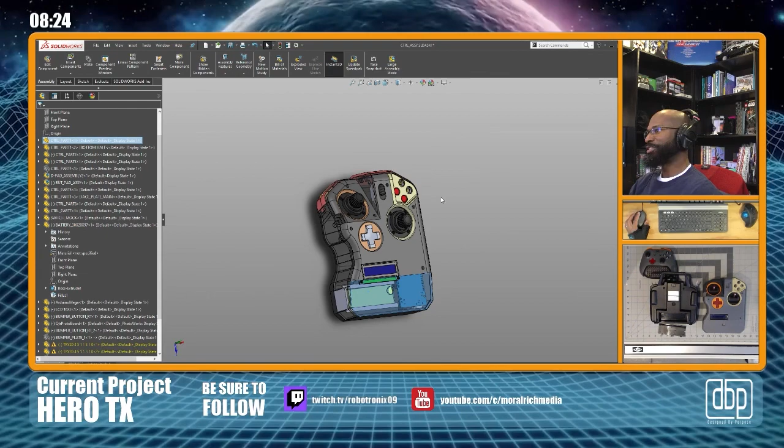Yes, sir. Yes, there. All right.